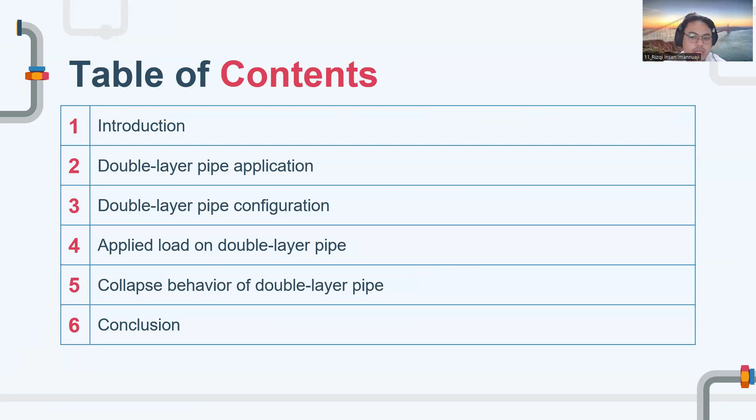In this fifth International Conference on Sustainable Futures: Environmental, Technological, Social, and Economic Matters, I will present my study about collapse behavior of double layer pipes, a review. There are six main contents for this presentation. The first one is introduction, and then double layer pipe application. Continuing on, there is double layer pipe configuration, and the fourth one is applied load on the double layer pipe. Proceeding further, there is collapse behavior of double layer pipes, and the last one is conclusion.

Coming to the first section, it is about introduction. Pipes serve as essential conduits for fluid transportation across diverse industrial sectors, especially in the marine industry. Pipes also come with single layer configuration or double layer configuration with many different materials. A double layer pipe or DLP structure refers to a pipe within a pipe or encased in an outer covering with an annulus between the two diameters. A double layer pipe also can be considered a modern pipe structure.

In this article, we will focus on studying collapse behavior of double layer pipe under bending load and external pressure by comparative study of various pipe failure articles and various double layer pipe configurations that have been studied.

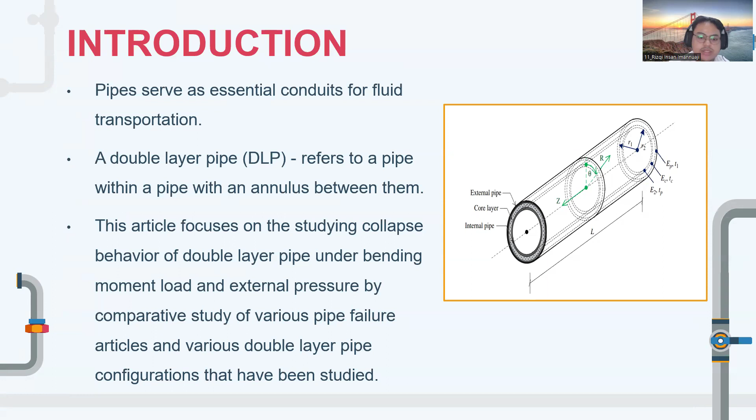Moving to the second section, it is about double layer pipe application. DLP is usually used in the marine industry sector because of its unique characteristics. For the DLP application itself, it is usually used in deep water oil and gas pipe, also cold water pipe or CWP in ocean thermal energy conversion or OTEC.

For the deep water application, DLP will provide exceptional resistance against corrosion, cathodic disbondment, as well as abrasion and physical damage. And for CWP application, composite materials are usually preferred for this construction because of their high strength and lightweight property, especially in double layer pipe configuration.

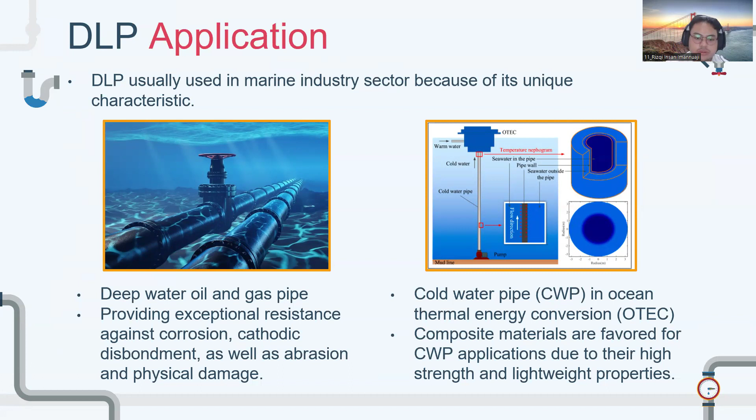Continuing on to the third section, it is about double layer pipe configuration. A DLP or double layer pipe is a secondary containment piping system that consists of an inner and outer pipe with an interstitial space between the inner and outer layer. Basically, a DLP is a pipe that has a core between two pipes, inner and outer pipe, which usually have a different material or configuration for the pipe and the core.

As for the core configuration, first there is stiffener core. Stiffener core is a core that is made by using different stiffener configurations to make some kind of pattern. Usually, it is used to increase the strength of the pipe, but still achieve the lightweight structure. For example, a stiffener core is the isogrid core, that is a grid stiffened structure where the grid makes an equilateral triangle that is built from a combination of helical and circumferential stiffeners. Isogrid core also can be seen in the first figure.

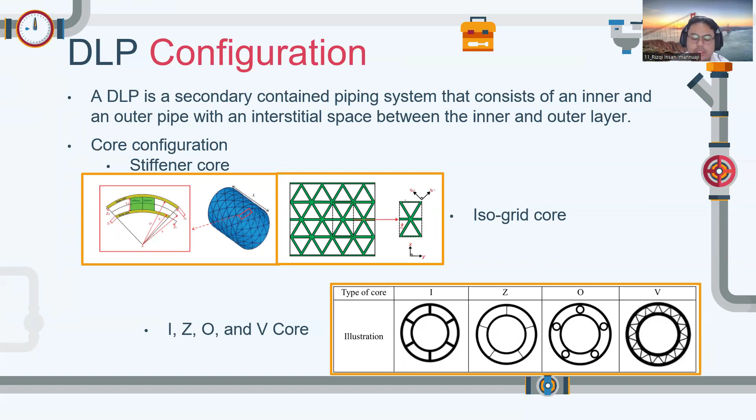Also, there is I, Z, O, and V core. I, Z, O, and V core is basically a core that has different stiffener structures, and each one of them will resemble its name.

Another type of core configuration is solid core. Solid core is a core that is made of a solid material. The material itself can vary. For example, there is cement annulus core. Cement annulus can be considered a solid core and can consist of strain hardening cementitious composite or SHCC or fiber reinforced cementitious composite or FRCC and many other cement composites.

Another example is polypropylene core. Usually, it's made for lightweightness. That is a core made of polypropylene material.

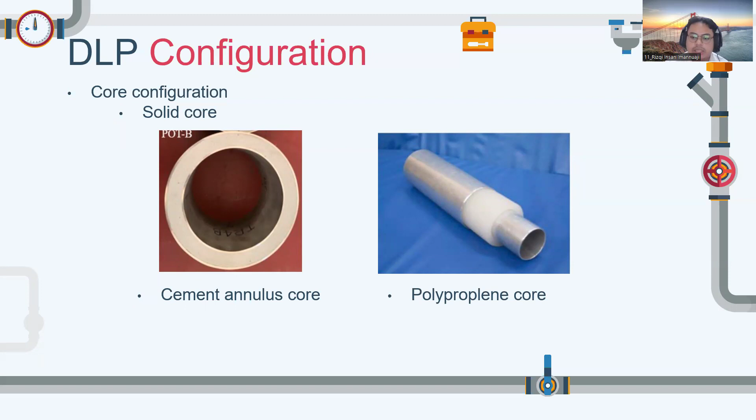Proceeding further to the fourth section, it is about applied load on double layer pipe. The first load that double layer pipes usually receive is a bending load. Bending load represents one of the major loads experienced by underwater double layer pipes. These loads arise from the surrounding water weight, ocean underwater current, and the pipe's own weight. For the bending moment of the pipe, it can be calculated using this formula.

Sigma bending equals M times D divided by 2I, where sigma bending is the bending stress, M is the bending moment, D is the outer pipe diameter, and I is the pipe moment of inertia.

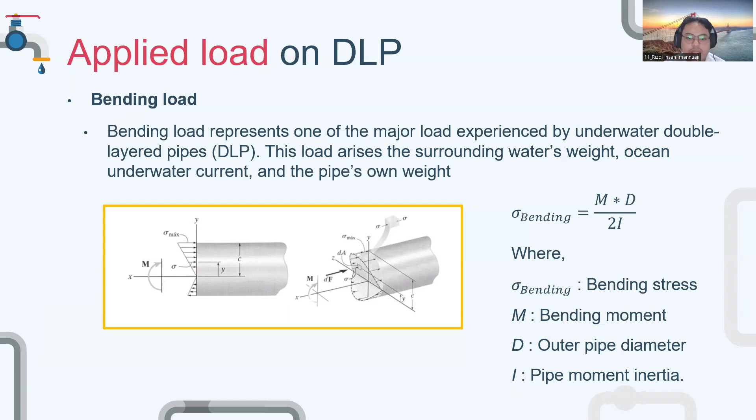The second load that DLP usually receives is hydrostatic pressure load. Hydrostatic pressure load is exerted by a fluid at rest at a given point within the fluid due to the force of gravity. It is proportional to the depth measured from the surface. It is the main load that underwater DLP needs to withstand.

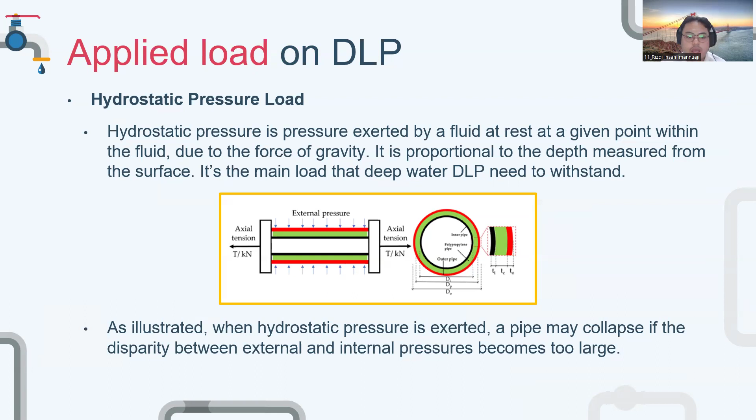As illustrated, when hydrostatic pressure is exerted, the pipe might collapse if the disparity between external and internal pipe pressure becomes too high. For the calculation formula, you can see my paper.

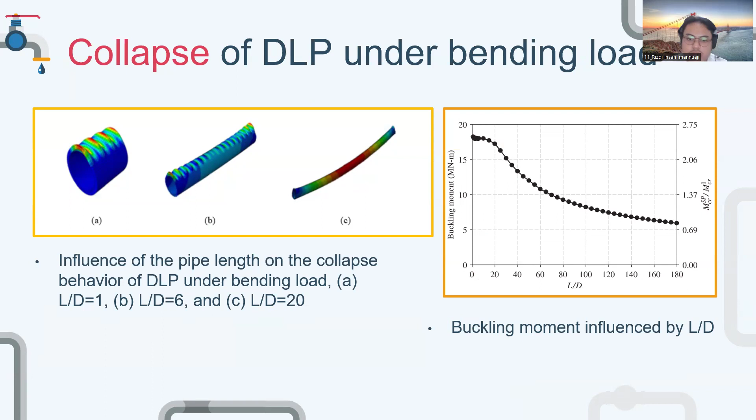As can be seen, the number of wavelengths changes linearly with respect to the pipe length. This indicates that the buckling moment of a longer pipe is smaller than a shorter pipe, as shown in this graph. The second and third factors that affect the buckling moment are the core thickness ratio and the core stiffness ratio.

For the core thickness ratio, the DLP with a thicker core layer shows the deformation magnitude of the external layer is considerably larger than the internal layer. But a thinner core shows that the deformation profile of the internal layer is like the external layer in smaller magnitude. Increasing the external layer diameter also increases the buckling moment of the system, as can be seen in graph A.

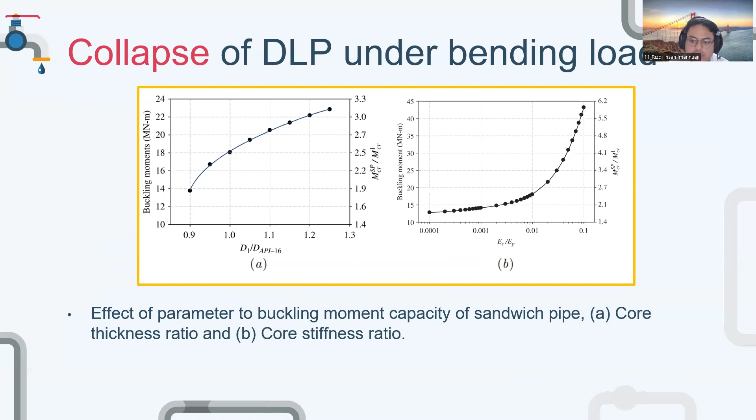And the core stiffness ratio also significantly affects the buckling moment of DLP, as well as the buckling mode shapes. In this case, the buckling moment will increase exponentially with the increase of the core stiffness, as shown in graph B.

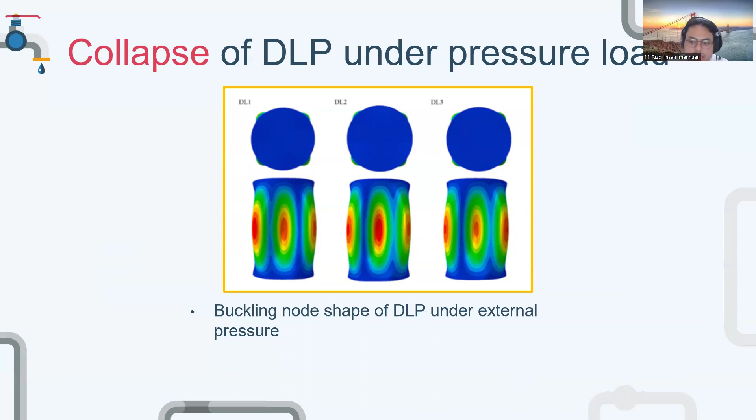Furthermore, in the fifth section, there is the collapse behavior of DLP under pressure load. As in the figure, the buckling modes of DLP under external pressure are different from those of DLP under bending load. The buckling modes of DLP under external pressure form an axial half wave and four circumferential waves, like in the picture. Continuing on, the critical buckling pressure is affected by the radius to thickness ratio and the ratio of core thickness to inner and outer thickness.

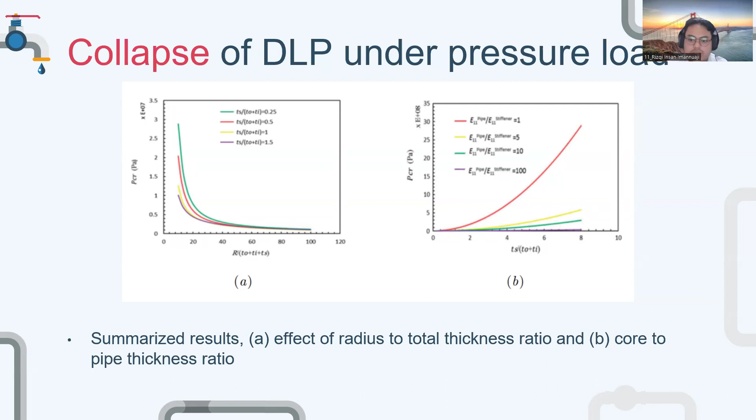Generally, the critical buckling pressure diminishes as the radius to thickness ratio increases, as demonstrated in figure A. And the ratio of the core to inner and outer thickness influences the buckling pressure of the DLP. An increase in this ratio leads to a rise in critical buckling pressure, as indicated in graph B.

Finally, for the last section, we can conclude five main points from the study. The first one, the primary factors affecting the buckling strength under bending force are pipe length, ratio of the core thickness, and the core stiffness ratio. Pipes with greater length have a smaller buckling moment, and an increase in both core diameter and stiffness enhances the buckling moment.

The primary factors affecting the buckling pressure are the ratio of radius to thickness and the proportion of the core thickness relative to the thickness of the outer and inner layers. The critical buckling pressure diminishes as the radius to thickness ratio increases, whereas an increase in the ratio of core to outer and inner layer thickness boosts the critical buckling pressure.